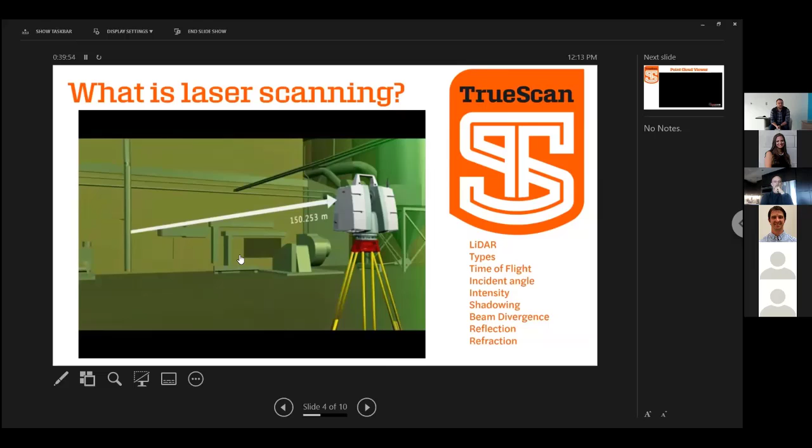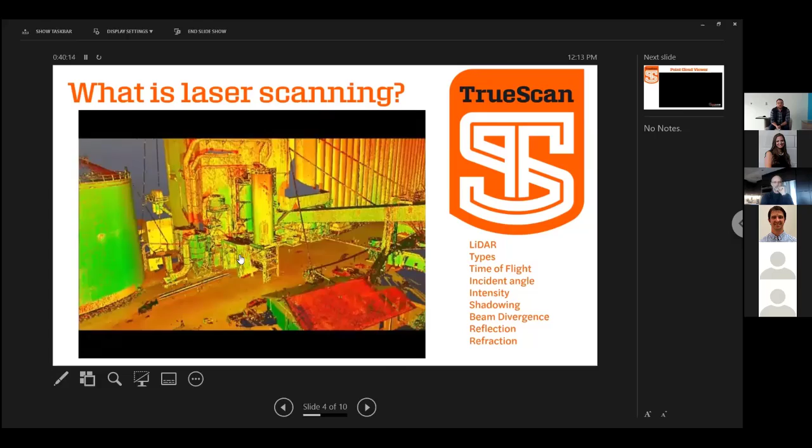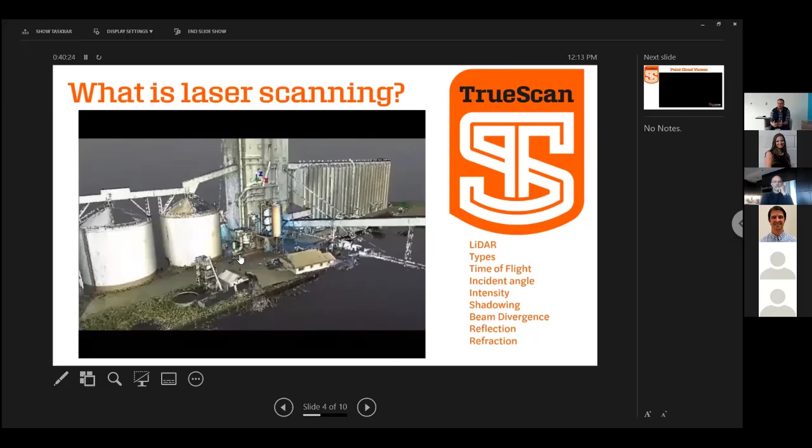It calculates its horizontal and vertical coordinate, and the result is a full point cloud that represents the space, and every scan is accurate to within, depending on the scanner you're using, about 1 millimeter. So that's the information that it picked up from one single scan. And then you also go through a registration process where you stitch multiple scans together in order to capture the backside of walls and a space in its entirety. And you can really accurately and really quickly capture that site and bring it into your computer to work alongside you with your design.

Let's see here. Here is the result of a scan. So this is a point cloud that we're flying through here in Autodesk Recap. You can see the immersive way that you can just be within the site. And from Recap, you can measure, you can identify critical areas that are important to your design. You can even count bolt patterns, and you can really be in the space.

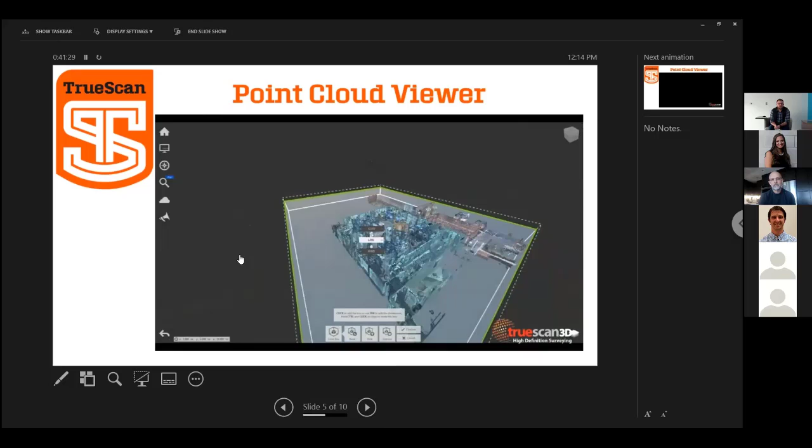And it provides a way for you to avoid going back to the site and missing things because it's all right there. Within Recap, you can section through. It's a really easy to use software tool. If you guys are Autodesk users, I think you would find it really simple and easy to use.

And then the great thing about Recap is the Recap file can be inserted as a link directly into Revit. And then you can basically model over top of the point cloud. We do have some specialized software that helps us model faster, things like pipes that can be automatically extracted, cylindrical objects. But then a lot of the model is actually just traced.

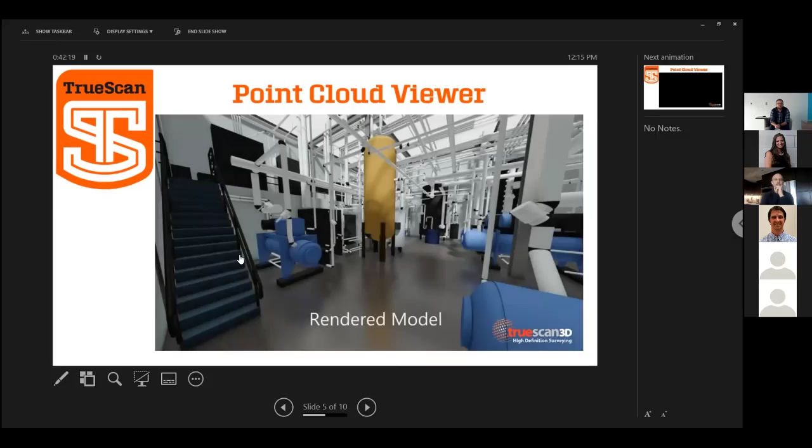And that's done by just cutting a lot of sections and being really careful with tracing accurately over the point cloud. As you can see there, the point cloud versus the final product in the model.

Let's go to the next slide. I'll show you a couple, or maybe just one project example due to our time. Many of you may recognize this building, downtown Cincinnati, 4th and Vine. A lot of people know it as the PNC building.

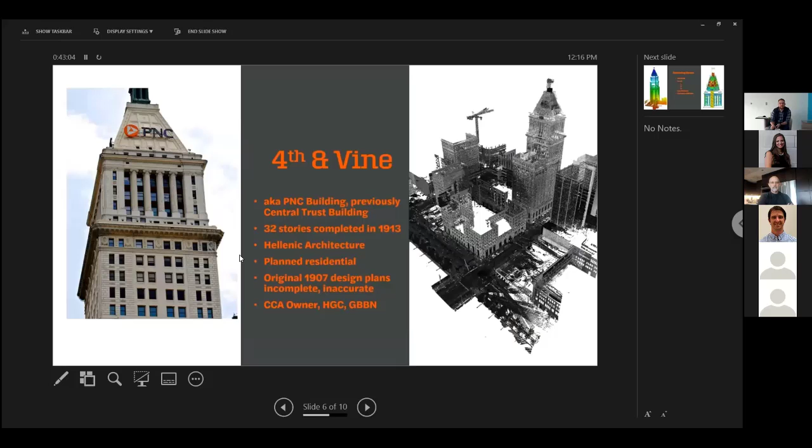This was a really old building that they were doing some renovations to a few different floors, and they didn't have accurate plans. They felt like they didn't have accurate plans. Obviously, built in 1913, what documentation you have there is going to be really old. And as we found, they were pretty outdated.

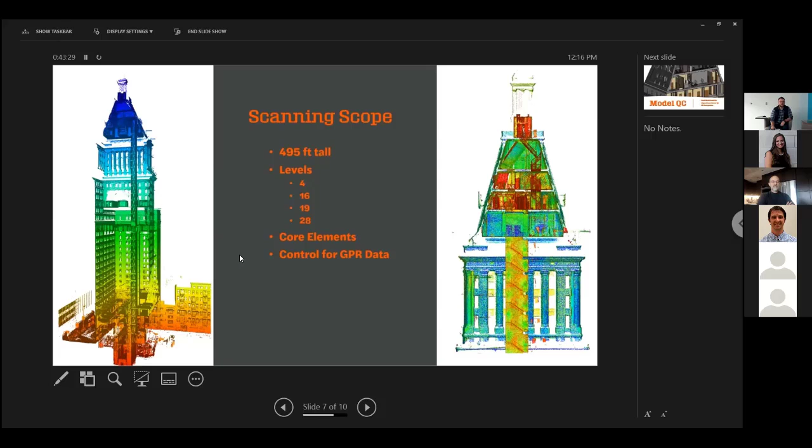You can see here the scan. We scanned the exterior, and then we scanned the 4th, 16th, 19th, and 28th floor specifically. And those were all tied together through a stairwell. And then we put that on a survey control. We aligned that to their existing Revit model to some columns.

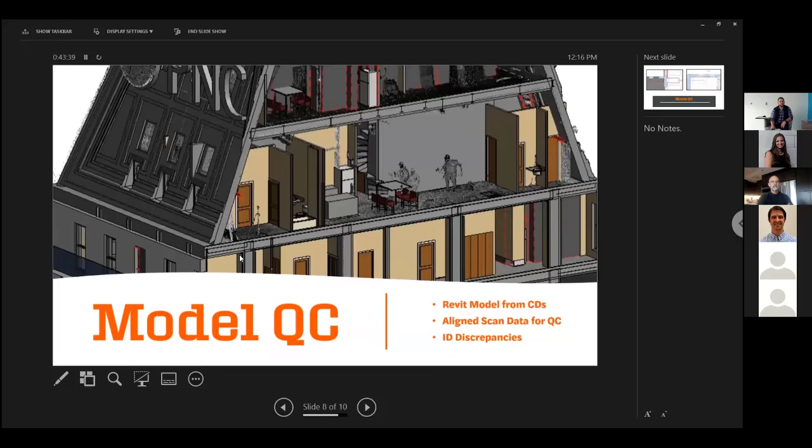When it's aligned to their columns, it comes in generally to the correct location. You can insert the point cloud via shared coordinates directly into the Revit model. So here you can see the cloud on top of their Revit model. You can see that the floor elevations actually aligned really well, which was somewhat surprising.

But we did find some major issues. There was a sky bridge over the road that connected to the building that you can see there on the left. The left side is where the bridge is kind of coming into the building. And we measured that was off over 3 feet, 3 feet 9 inches about. So that had a major impact on their design, and they were really glad that we found that error because it saved them a lot of time and headache.

And then the same on the right, there were just issues with where the modeled window was, where the design window was, and where it ended up being. We found a lot of these all throughout the space. As you can see, that's about 1.5 feet off, and that has an effect when you're trying to draw and design for partitions and bathrooms, and you're trying to fit within a space and meet your codes and everything. You want to know these discrepancies, and those were pretty large discrepancies, and we see that all the time on older buildings.

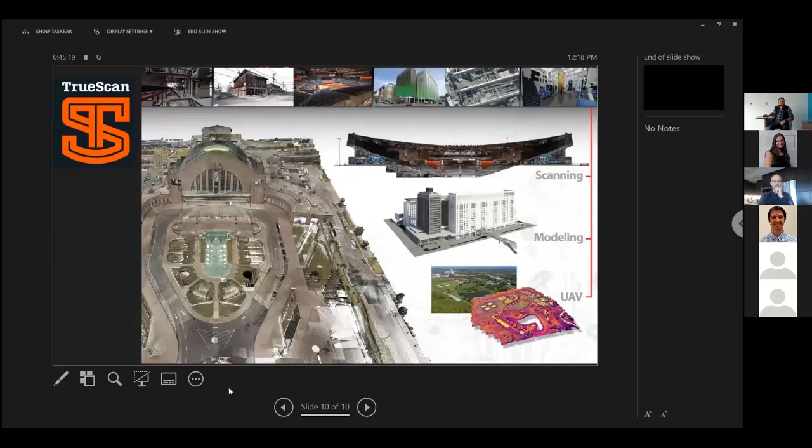So just due to time, that's the only project I had for you. Let's see if I can get out of here. With the remaining time that I have, I wanted to show you a project that we recently did. This is actually a project in Columbus that we did a couple of months ago, and it is an old school. It's called Starling School, and they are turning this into some type of housing, low-income housing, I believe.

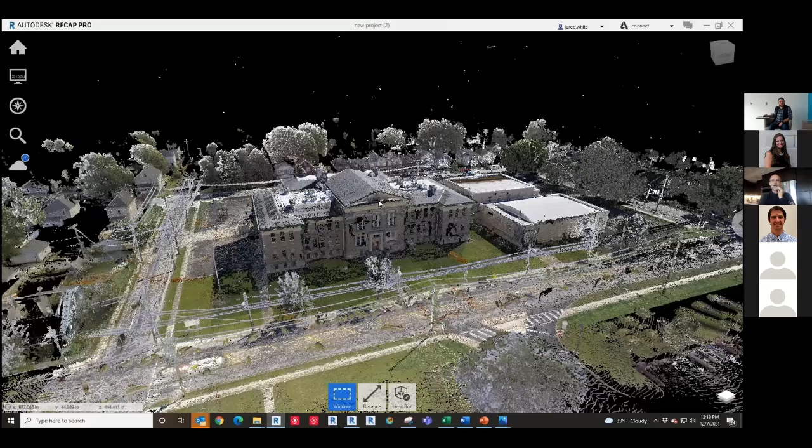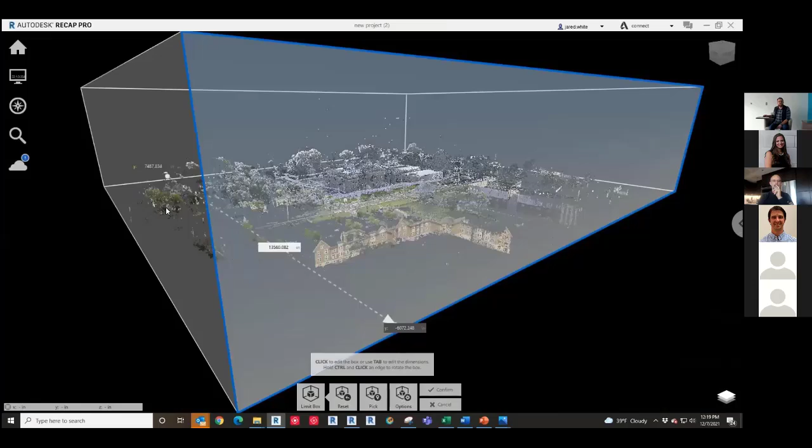It's a historic school. They had some kind of grant to renovate the school portion, or this portion of the building. This portion is being demolished. So we went in and scanned it. They didn't have accurate plans or any kind of accurate documentation, and we scanned the entire building inside and out, including above ceiling in some areas, and the attic to capture the roof. So there you can see all the way through the building.

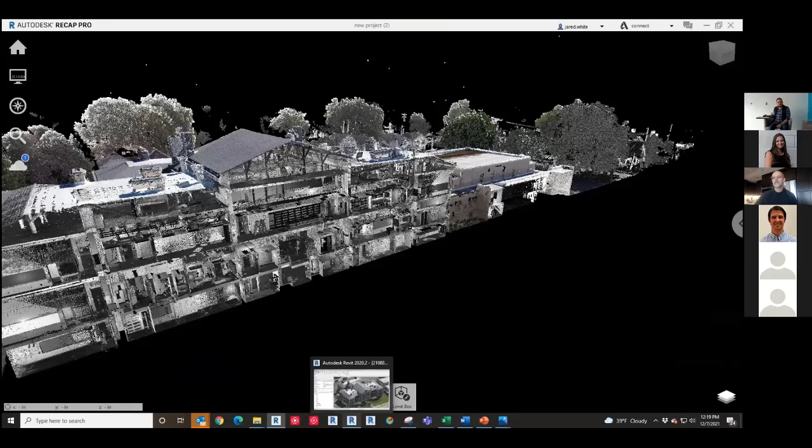So a fairly complex building because there were a couple of different additions. The floor heights are sort of all over the place, and that's a very difficult thing to measure in the field. But we were able to go into the school within about 3 days. We captured the entire building, and then registered it, and then we also turned that into, if I can pull it up, a Revit model.

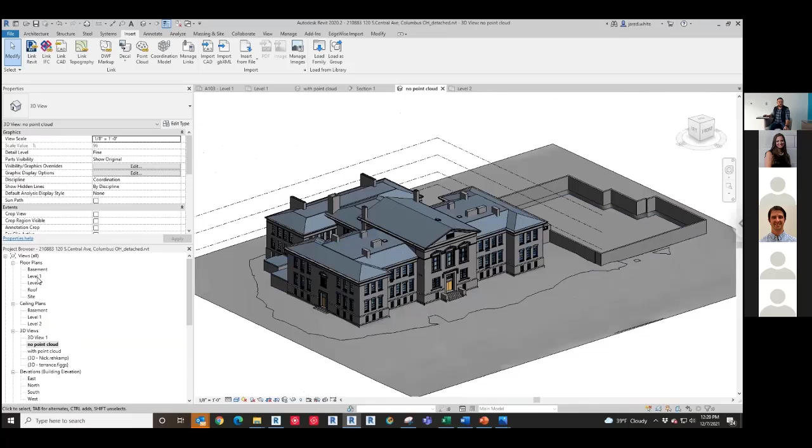As I said before, that point cloud can be brought right into Revit, and then basically reverse engineered, if you will. So there you have the two stacked on top of each other. And here is the final product, which is sort of the launching point for our client in this case. It gives them a really great base model and something they can trust to start their design. Really accurate floor plans, really accurate floor heights, floor elevations, and then obviously structure is also part of that.

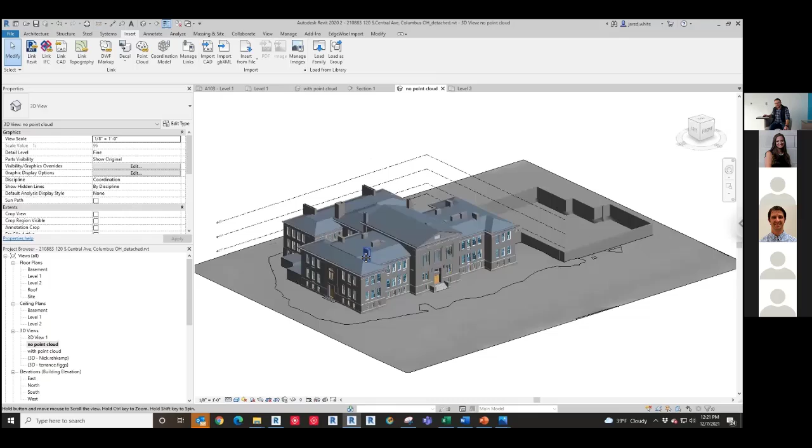Yeah, we have a question here. Go ahead. That's awesome. Yeah, hi.

So it's been a while, but I've used a point cloud model to translate that into a Revit model. And I'm curious with this process, how you go about approximating the level of detail that's shown in the point cloud model when translating that, say, into a wall that's square on one end but not on the other, and might not necessarily be plumb. Do you take like an average, or how do you get to what was shown in that floor plan you presented? Yeah, that's a great question, and it's something that comes up a lot.

A lot of times we need to have that conversation with our client because every project can be a little bit different. Sometimes they want to show the true condition of the wall. If it is crooked, they really want to show it as being not parallel, perpendicular. But in most cases, I would say 95% of our projects, we try to keep modeled elements perpendicular and plumb to within reason.

We state level of accuracy in our proposal. If something gets outside of whatever tolerance is stated or discussed, then the wall would maybe need to be broken, or maybe we talk about how we want to represent that. And then as far as detail, that's also a conversation, that the scanner is only picking up what it can see. So I don't know the way that the wall is built. I don't know the internal components of the wall or whatever it is that we're modeling. All I see is the surface.

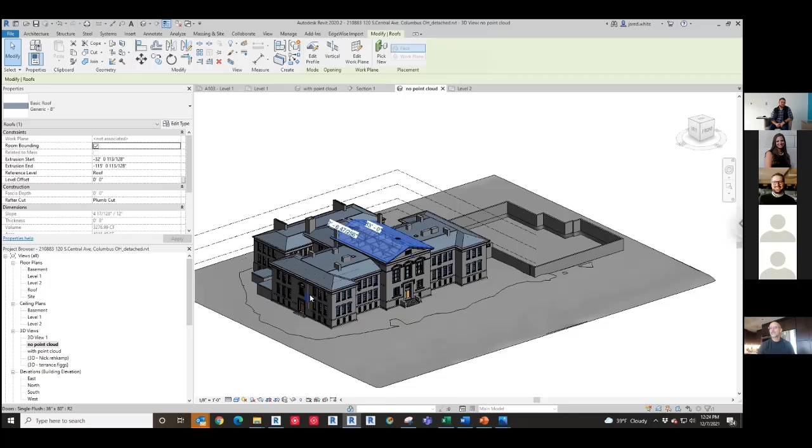And we can model simple holes in the wall for doorways, or we can put in a door with the correct swing, or we can put in the door with all the trim and the skylights and all the detail within a door. That's just part of the conversation and what you need and what would bring the most value to your project. Hopefully that answers your question.

Yep. Looks like we have two more questions and I want to move on. One of which here is asked, what is the approximate turnaround time? You said about 3 days to scan this building full inside and out, and the turnaround time to produce a model at this level? I know that's kind of hard to answer, it's per project. But it depends. It depends.

So we were in the building for 3 days, and we just had one guy in this case, which we could attack this in 1 day if we needed to. But in this case, we had one guy. I believe he was in there for 3 days, and then the raw data comes back to the office and it gets registered. That usually takes about a day or two.

And then the model in this case is, depending how many resources we have to put on it, between 1 and 2 weeks to turn around after the point cloud is delivered. So all in all, you're probably between 3 to 3.5 weeks, I would say. Okay, and I'm sure a lot of that comes down to how much detail you need, as the previous question asked. Awesome, thank you. Absolutely.

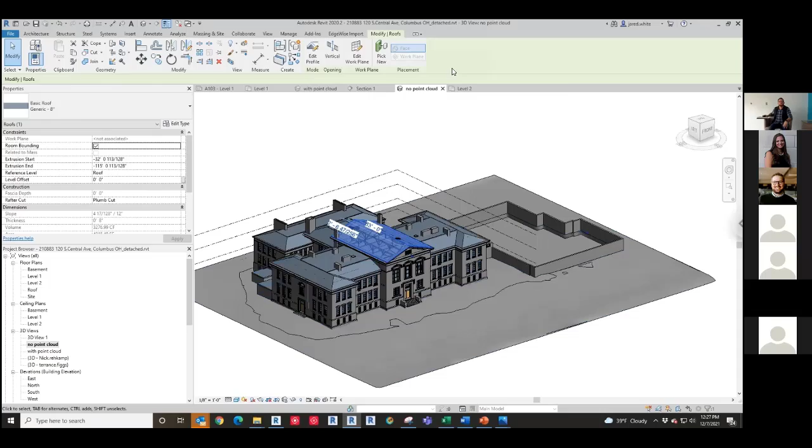But with that being said, let's go ahead and transition over to Phil to talk about Enscape. Can you see my screen? Yes. Oh, great. You guys can hear me as well.

Good. So let's talk about really, it's not so much about real-time rendering, but it's also about just increasing understanding and helping people to have confidence during the design process that what they are imagining is actually going to happen. And I've been working with the Enscape team coming up on 6 years or so, from the very beginning. I reached out to Thomas, who was the CEO at the time, and was just blown away by what they had put together.

And I think the challenge for rendering, we've always done it. I remember sleeping under my desk in order to create renderings, because if for some reason the computer crashed, you had to start again. And what Enscape has done, I think they've really just set the bar. They've really raised the standard with regard to rendering, because it's real time. So why is that important?

I think Revit is incredibly valuable. We're seeing in the previous presentation, having models is just essential for a base level understanding of a design and a design process. And I think what you get from Revit in those terms is a lot of analytic information. You get plans, sections, elevations, schedules. This is a hidden line perspective of a project that I use for demonstrating and training people on how to use Enscape with best practices.

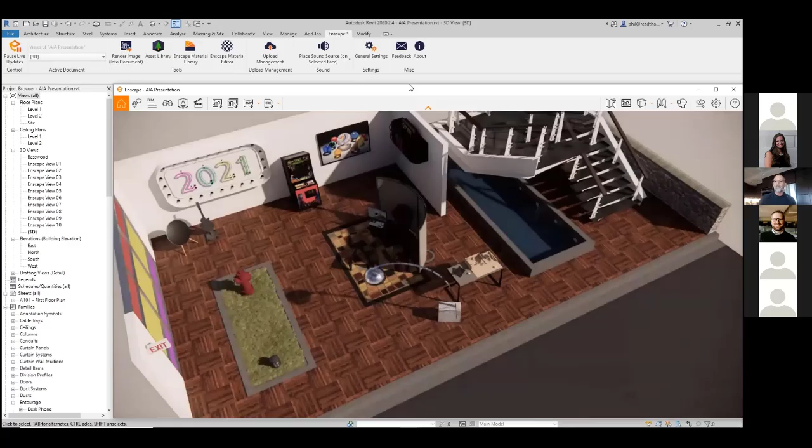This project's going to take about 15, 20 seconds to open. A really large project might take 30 seconds or a minute to open. And then you're going to be able to navigate and fully explore that project, changing the time of day, changing the time of year, and really explore that project as if you're in first person mode.

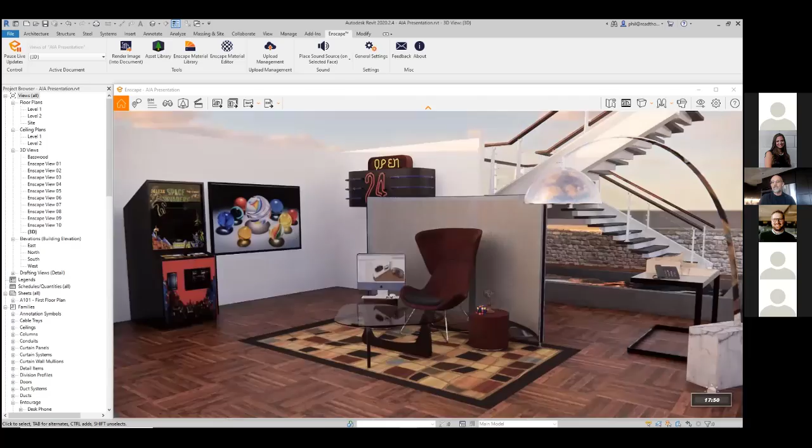So I'm just going to navigate to a point. I'll go ahead and turn on... I'm just going to move the time of day here and help you understand that you're really seeing the information in a very, very emotional way. And I'm just going to keep going and changing the time of day until the sun actually goes down.

So what Enscape is doing is just taking what we've already put into Revit and then allowing us to visualize that to an emotional level of detail, either on the desktop, on the web, even in VR. So it's very, very easy to use. It's also very fast. And so I'd like to just illustrate that right now.

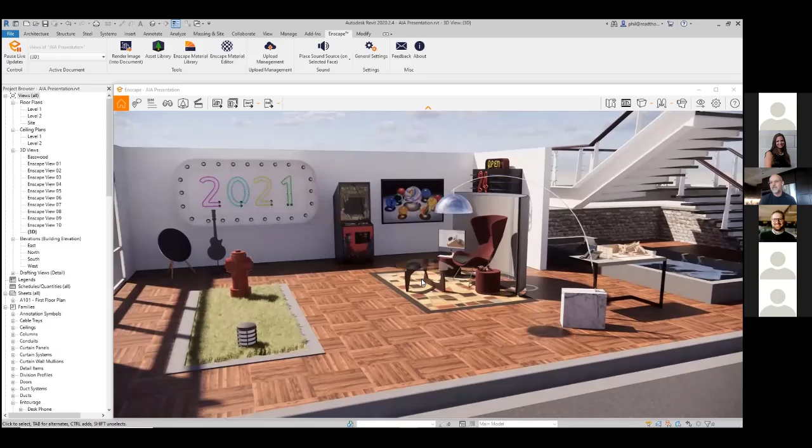You know, the design process is one of iteration. Things never stop moving. We're looking at options, and it's really important to be able to see those options and see those changes in real time.

So if we want to change the geometry of something or the material of something, the way we change it in Enscape is actually to go back to the design tool and make the change there. So I've just selected this floor, and I'm going to do something that's very familiar in Revit, and that is just go into the type parameters and change the material of this floor. It's going to open up the material editor, and let's just choose a different flooring type, just a different floor material, and then select OK.

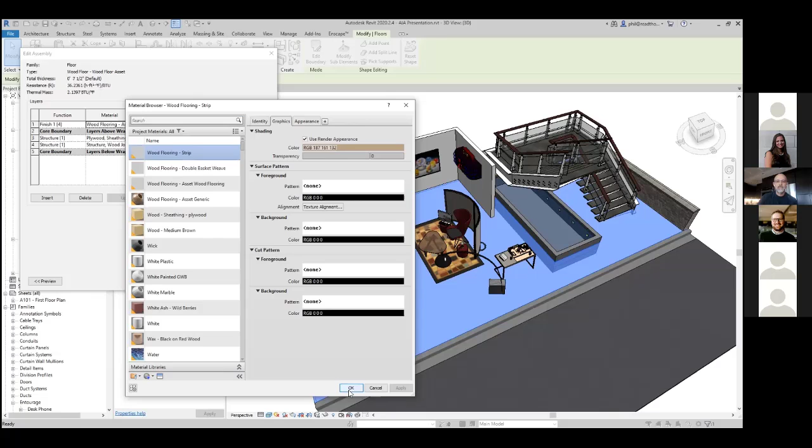And then I'm going to go back to Enscape for a moment just to let you see what's here. And then we're going to go back to Revit and complete this command and say OK. By the time that's done, this is going to update in just a moment. So that floor is updated. It's updated in the model, which means it's updated in Enscape.

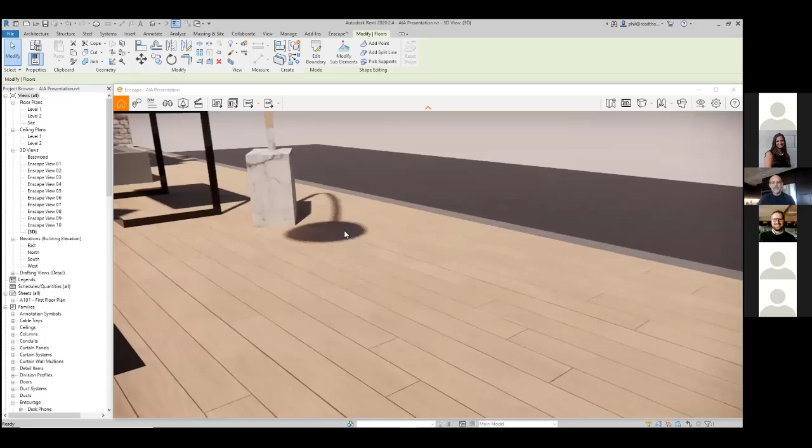And the level of detail here can be really extraordinary. So I'm just going to bring the sun down just so we can start to see the reflections and the material finish in this floor. So you see that hot spot, and you're starting to see where the light is reflecting. And it's not just about the material or the color or the texture of the material—it's also about how that material reflects light.

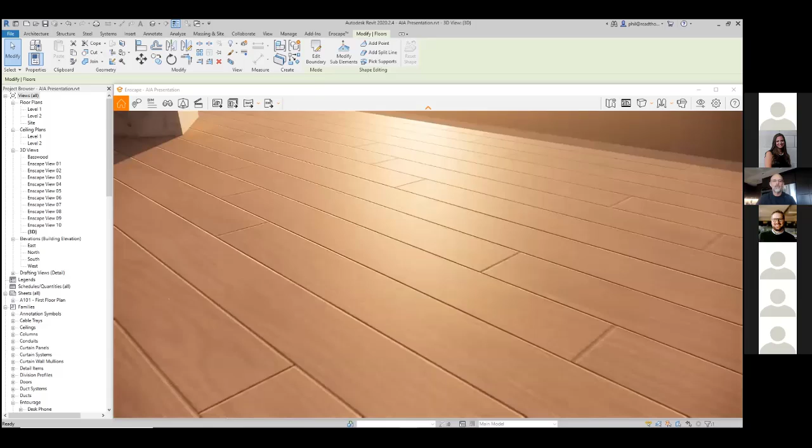That's how something appears natural. And if it doesn't reflect the light in a very natural way, then it begins to look plastic. So it's very important that cloth have a cloth type texture, and wood has a texture where you can see the grain and you can see the light bouncing through that grain.

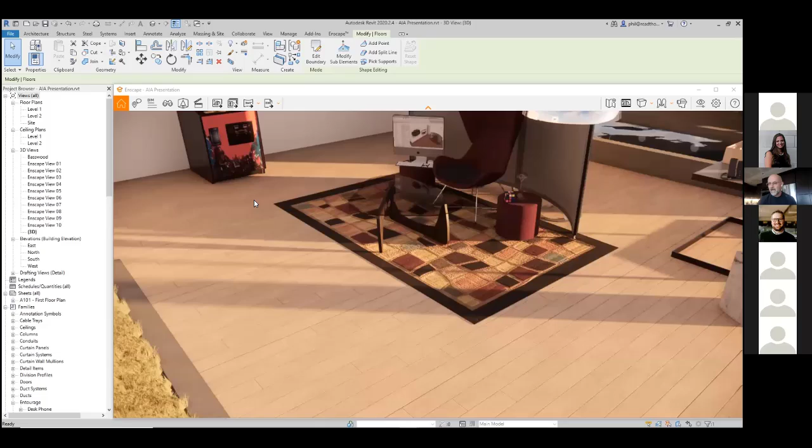So right away from the very beginning, it's very easy. You simply start it. It's fast. As you make changes, they update in real time. It's not expensive—Enscape is an annual subscription, and the annual subscription for a network license is about $800 a year. And I think the big benefit is that it's just really, really beautiful.

Enscape—the two really critical pieces that you need to think about when you're working inside of Revit: number one is how are your lights going to appear, and number two is how your materials are going to appear. And lighting comes from two artifacts in Revit.

One of those artifacts is the actual light object that is inside a lighting family. So I'm just going to jump over to Revit here, zoom in, and open up one of these light families. All of your light categories in Revit have a light object inside them. And if we look at this in 3D, we can actually see the light object. That light object that is native to Revit families is what illuminates inside of Enscape.

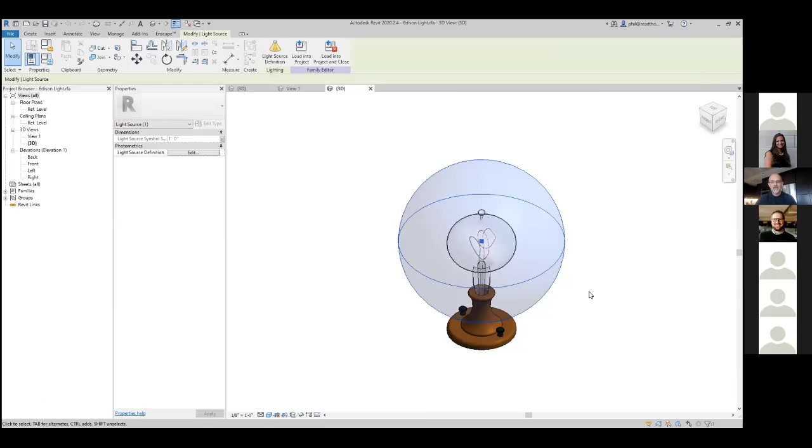So that's all that you need. They're going to work automatically. So if we go back to Enscape and change the time of day, the reason this light appears to illuminate is because of the light family, the light object that's inside of the family.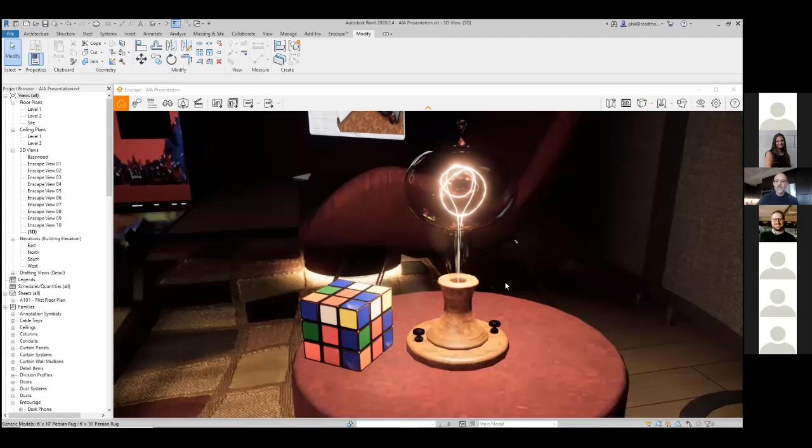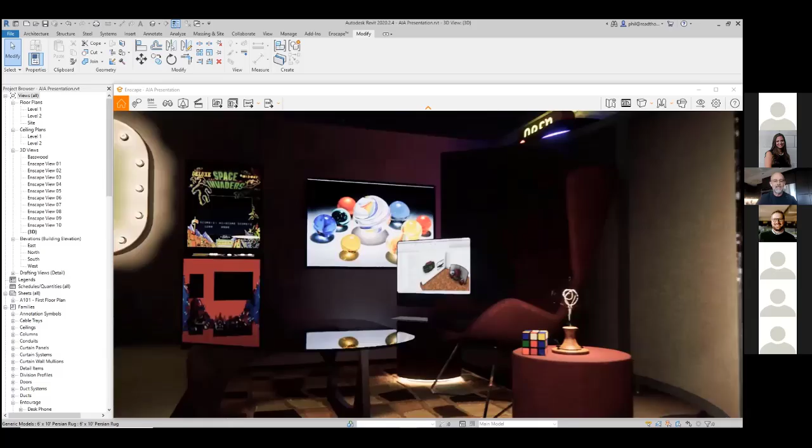The other illumination artifact that's native to Revit is self-illumination, and that's self-illumination of material. So the little wire inside this light bulb has a material applied to it that's also self-illuminated. Things like reveals, accent lighting, TV screens, computer monitors—all of those effects are created by selecting the material and giving it a subtle amount of self-illumination. That gives you, just those two artifacts alone, an entire universe of lighting. It's just the illumination of the geometry or a light object.

That's number one. Number two is the material. It's really important that your material not only have the appropriate kind of photographic texture, but also the appropriate bump map, displacement maps, grit, grain, so that the light doesn't bounce off of the geometry in a very plastic looking, perfect, smooth way. So if you have a wood floor and you don't have that wood grain in there, it's not going to look natural, and then it's kind of distracting.

You don't have to do this stuff at the beginning. At the beginning of the design, you don't have time to put all the lights in and all the materials in, but as the design develops, it's all there.

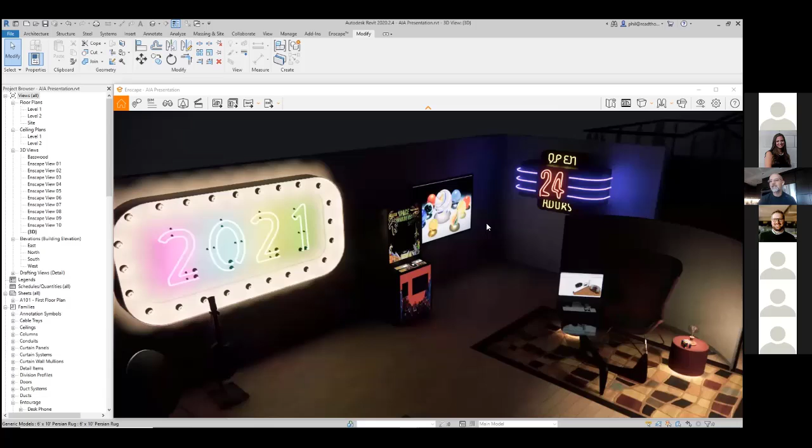The third thing that I want to illustrate is the importance of Revit to maintain that analytic truth and yet push that information over to Enscape in a way that can create this sort of emotional quality and maintain the coordination between the two. So I'm going to turn the lights up here in this model, and I'm just going to back out. One of the issues that we have in Revit is over modeling geometry.

And that can really give your models a lot of trouble. Early on, we don't really know exactly what that component might be. We just know that we need a chair, we need a table, we need a piece of furniture. Later on, we're going to decide exactly what that might be in order to create the emotional level of detail, and we can actually simulate this kind of environment inside of Enscape.

Enscape has an asset library with an enormity of beautiful furniture, office entourage, people, and cars. But when you're inside of Revit and you just want to place a piece of furniture, I'm just going to place a chair here—this is just a simple task office chair. And this task chair is sufficient for where is it, what is it, how many do we have, what level it is on, and how it's going to schedule.

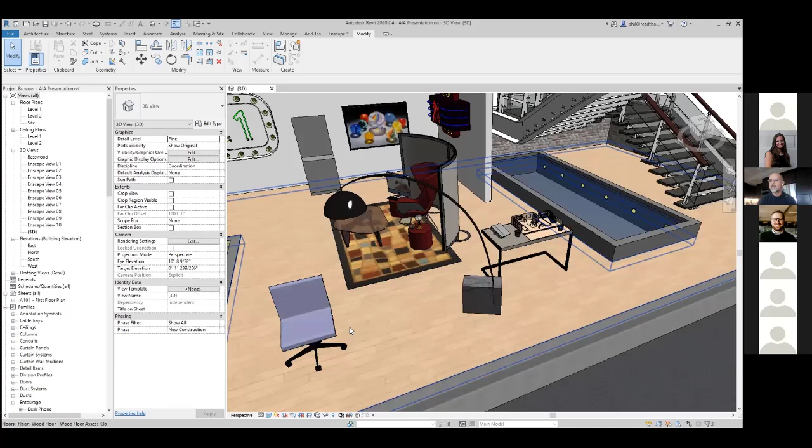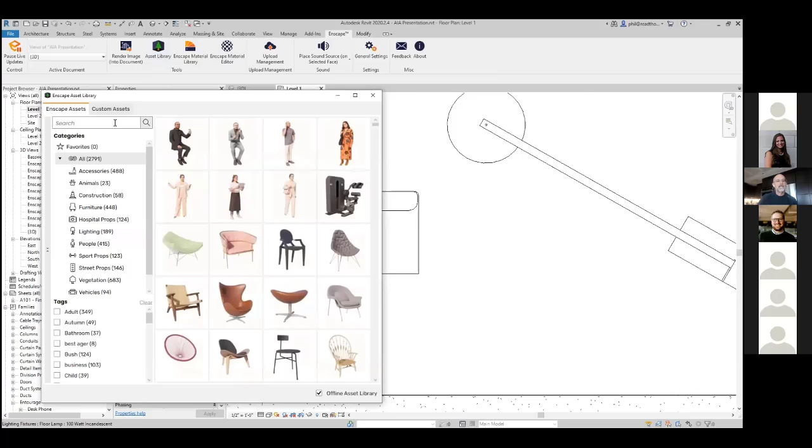The task chair looks fantastic with regard to, that's all it needs to be from an analytic standpoint: plan, sections, elevation, schedules. Now, Enscape has beautiful assets as well. I'm just going to open up the asset library and do a quick keyword search for furniture or chairs, and select an office chair here. Then what you can actually do is make an association between your Enscape asset and your Revit family so that they're continually coordinated.

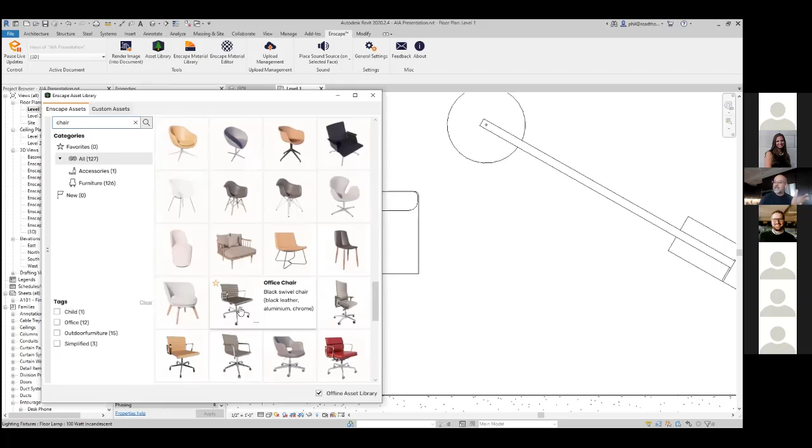And there's a particular chair that I really like because of the details. So I'm just scrolling down here trying to find it—and it's this one. So I'm going to place this office chair in the project. Now, Enscape assets are actually not modeled natively in Revit; they're modeled in Blender, to a very high level of detail. I'm just going to place this chair here in plan.

And I think right away you can see the challenge: this Revit component is perfect from the standpoint of its plan, sections, elevations. This Enscape asset looks amazing—I mean, this is just down to the grit, grain, and texture of the leather. But from an analytic standpoint, it's really going to clutter the Revit file.

And Enscape assets also, when they're making these components in Blender, they don't know what category to put them on, they don't know which orientation, they don't know where the origin is, but they're beautiful. So here's what you can do to save you a lot of time and aggravation, where you can keep that beautiful Revit native family and link it to your Enscape asset so that it's always coordinated.

There's another option when you're in the Enscape asset library, down here at the lower right-hand corner, it says link Revit family to asset. I'm going to select this option and do a quick keyword search for this task chair, select it, and select OK.

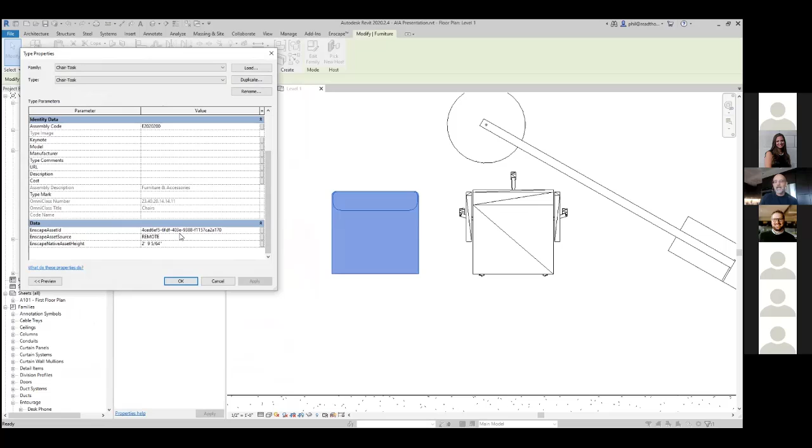What that does is it very quickly, almost instantly, opens the family, builds the parameter data from the Enscape asset, and associates it to the Revit family. So when we select this component and go into the type properties, Enscape has added this asset information to the component. The result is you still see the Revit family in Revit, but now you see an Enscape asset inside of Enscape.

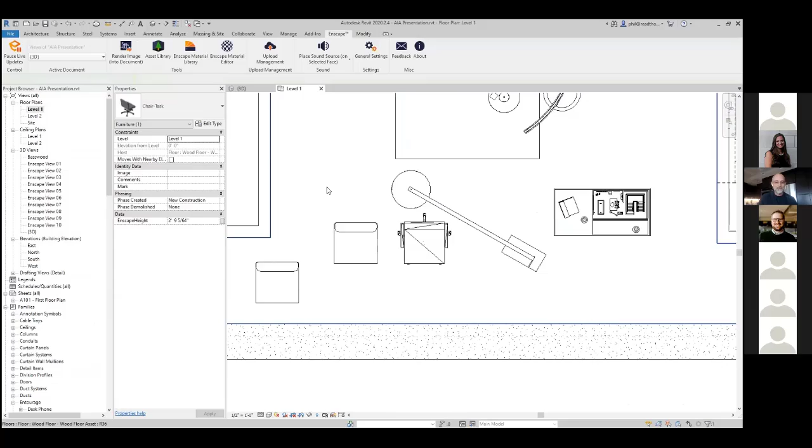And if you move, copy, or make another instance of this chair—so I'm just going to create another copy and place one over here—here's the Enscape asset inside of Enscape.

All right, so that's my presentation for you guys. If you want to go on a deeper dive, I'd be glad to do so with your teams. We can do a best practice webinar, please reach out. That's essentially a quick overview of the value of Enscape and a few techniques with regard to why lighting is important, why materials are important, and why linking Revit families to Enscape assets is important.

Thank you very much. Thank you, Phil, I would just like to say you should have heard the sounds coming out of the people in the room when you linked those two assets together. So thank you for sharing that. Absolutely, glad to do it. Thank you for letting me be part of this presentation today. Absolutely, thank you so much.

Okay, any questions for Phil? Or we can wait till the end. I've got my little timer going on here, so I don't want to go over. I think we got some time, we're actually running a little ahead of schedule, so this is great. So yeah, if there's any questions, feel free to ask them.

So can you do that with any asset? You can do it with trees, bushes. Yes, you can do it with any asset. You can even do it with your custom assets.

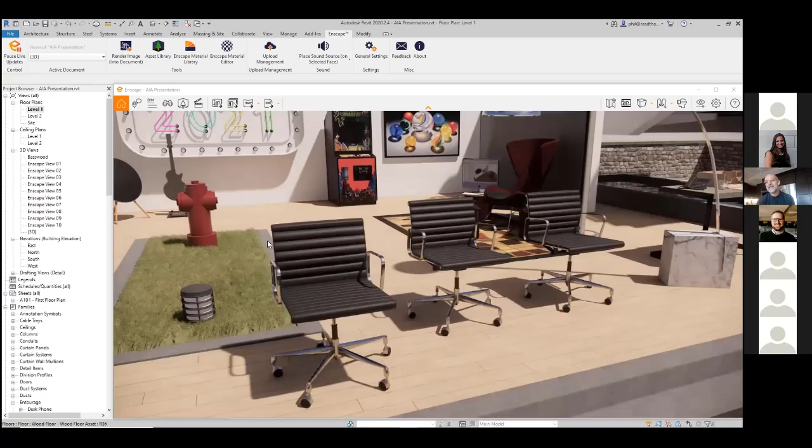If you guys know Joseph Kim, I'm like, Joseph, we got to get better assets inside of Enscape. So he's taking SketchUp warehouse components and turning them into Enscape assets. I build a Revit family and link them, and then we put an animated texture inside the screen. You can take trees—I don't want a complicated tree inside of Revit, I just want a circle that's model lines on the ground with a little dash pattern for the drip edge, and then link it to an Enscape asset.

The only thing you'll have to do is, in some cases, the Enscape asset team can't predict the orientation or the origin of the family, whether or not it's going to match the one you've created. And you can't manipulate the origin and orientation of the Enscape asset. So you probably have to open your Revit family, possibly move it, possibly reorient it, and then they'll line up.

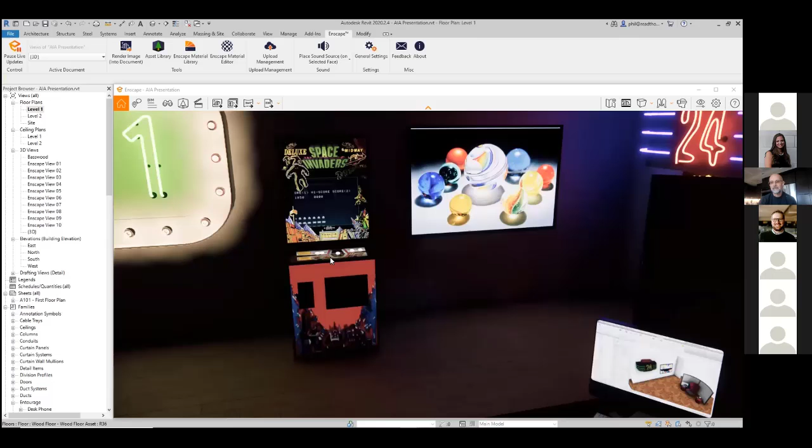When you rotate an asset that's linked, though, does it rotate or does it stay in place, even if you rotate, say, that chair? Yeah, you're going to go back to Revit, hit your space bar, move the chair, and then when you go back to Enscape, it's going to be moved. It's just, yeah, gotcha.

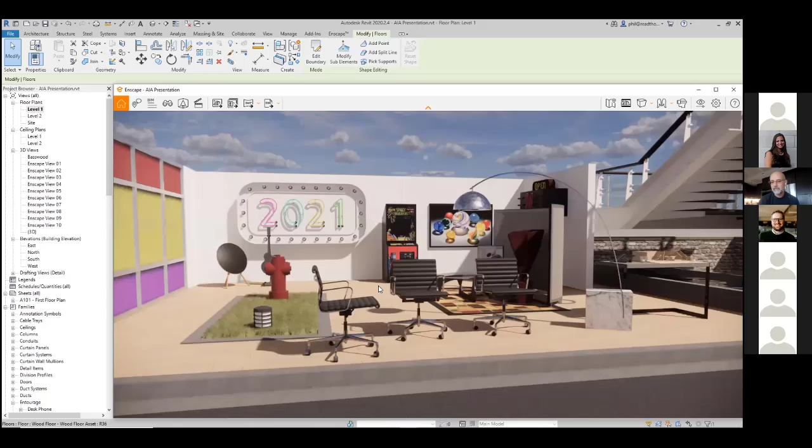Awesome, thank you. We did get a question come in through the chat asking if you could demonstrate Enscape's material editor. That's what I was about to do. Yeah, okay, and I'll be upfront about this.

The material editor in Enscape, number one, it only works with Revit generic material types. So if you open the material editor and go, wait, where's all my Revit materials? If they're not generic material types, they're not going to show up.

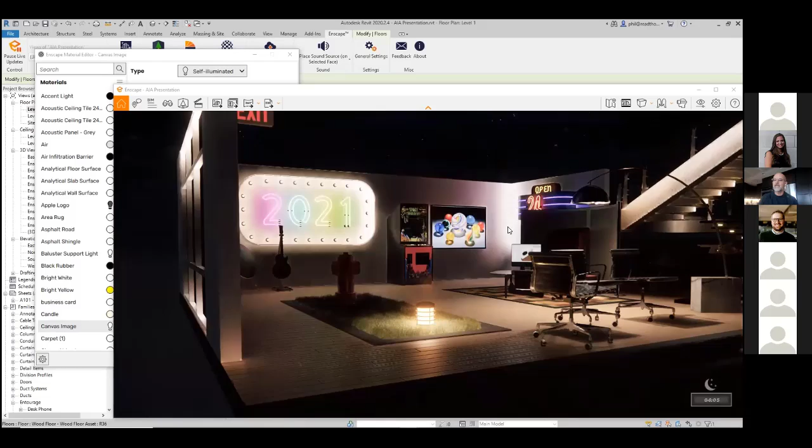I'm just going to select material here, and this is the material texture for the big TV screen in the back. It's really not a marble screen, it's a TV screen, but it's got the marble painting on it. You see how it's illuminated? Well, that texture has illumination applied, and it has a material applied, and it has a little bit of bump—I just like that little bit of texture. But this is the material editor.

Enscape also has a material library, but at the moment there are workflow issues around multi-user workflow. My best practice is to put all your custom materials in a folder at the top level where everyone can see them. And they haven't really thought this through with the Enscape material editor. So a lot of times if I want that Enscape material and I want other people to see them, I'm going to go and find that texture somewhere on my hard drive and take all of the pieces and parts of that texture and move it into my project custom texture folder.

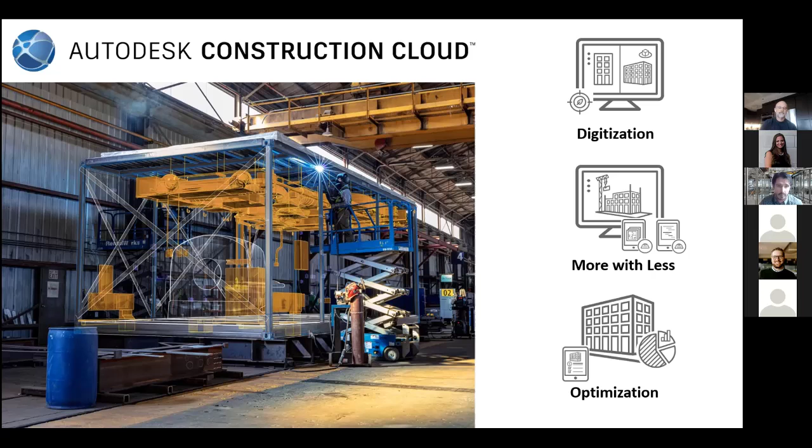The main point of this piece of the platform is to enable design teams that are highly iterative, in many cases distributed across different geographies and offices, to get a better workflow in place for model management, version control, and some of the communication practices in a project. It's built on the idea that we're trying to build out best practices, optimize over time and focus on continuous improvement, whether that's a project or an internal company trying to solve those things. The platform can handle both.

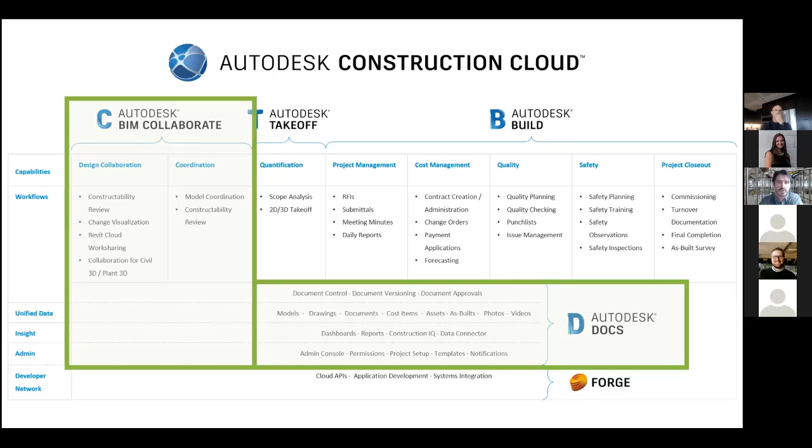So again, a lot to this. We're not going to cover it all today, but I'm gonna go through a pretty quick and dirty demo, if you will, of the main components of this platform. For some of you guys, you might already be using it. Others, this might be completely new. If anybody is a former BIM 360 user or even current BIM 360 user, this is essentially the next generation of that platform, right? So we'll jump into the demo component.

I'm not a big PowerPoint guy, so we'll get into the specifics here. Josh, just a spot check. Can you guys see my screen? Should be Google Chrome at this point. Yep, we got you. Awesome, cool.

All right, so just a couple basics for everybody, just to understand the mindset here. I am in a Google Chrome environment. I am signed into my account. I'm affiliated with a project. You guys can see at the top of the screen, this Blue Devil Residence Hall. And I'm in basically the project Autodesk Docs aspect, where all the files essentially would live for a project.

Couple things just to point out. When I talk about the platform, we built this out in terms of specific modules that are really geared around specific functionality that's needed for maybe specific personas involved in a project, maybe specific workflows. The important thing to understand here is that the capabilities of the platform can be segmented out by persona.

I, for example, am an admin. I have access to everything. That's not always the case, right? If we have someone that's maybe geared around Revit modeling specifically, not really involved in any construction type activities, they're probably only going to see maybe these top two, Docs and Design Collaboration, potentially Model Coordination if we're talking about some clash workflows.

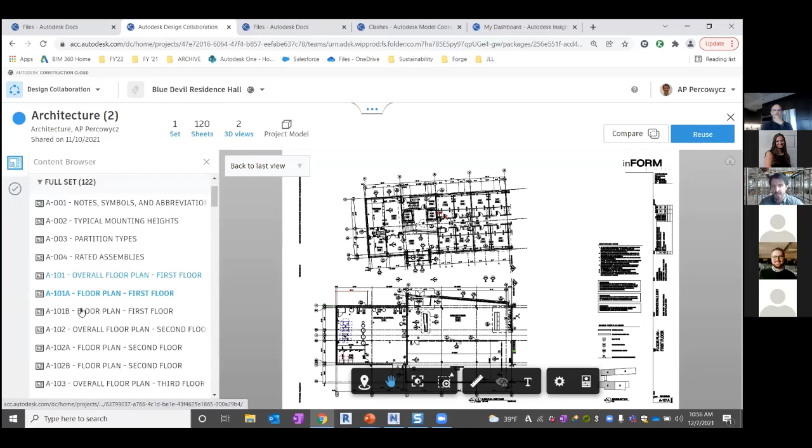And this will launch open the 3D viewer that it seems like I'm still unfortunately having some issues with. But nonetheless, from a Revit standpoint, I can start understanding, and here we go, I got a sheet to load. I can start understanding the scope of that share, the state of the model, whether it's 3D or 2D, really the system does not care. I can define in Revit whatever I want to push out.

So if I'm trending towards a milestone, I can share the appropriate sheets and provide an environment where the team can start self-serving some of that viewing of most current information across the project ecosystem, regardless of the discipline. You can click in on, say, the electrical set and be able to view the scope of their latest and greatest. The nice thing about this is I can take this a step further.

Because all of the data is being self-contained in the cloud environment, it allows me to wrap some more advanced functionality around this that enables the workflow, specifically the ability to compare versions of these models. So if I wanted to compare the version of architecture from November 10th versus the last time architecture shared that model, going back to October, let's say I'm a mechanical designer. I want to understand what implications might affect my discipline. Going into this compare allows me to select those versions of the models and show those changes.

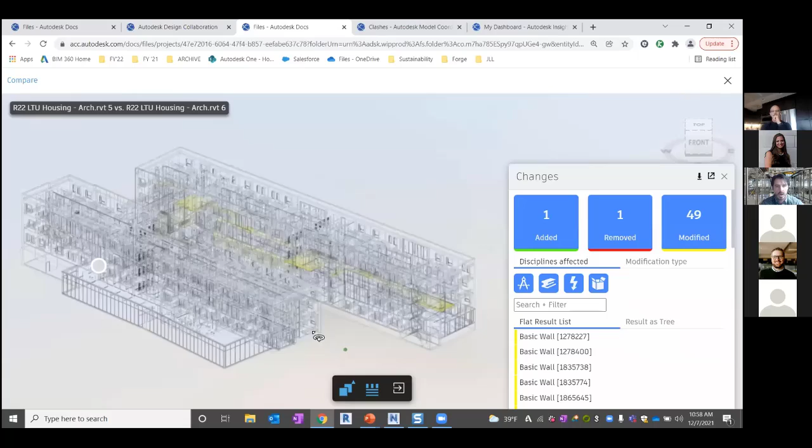And I'll launch open a viewer where I've already got these showing in terms of the change visualization. And you'll see the model in terms of the architecture versions is being colorized for me. And it's actually articulating what's been added, what's been removed, and most importantly, what's been modified in this environment.

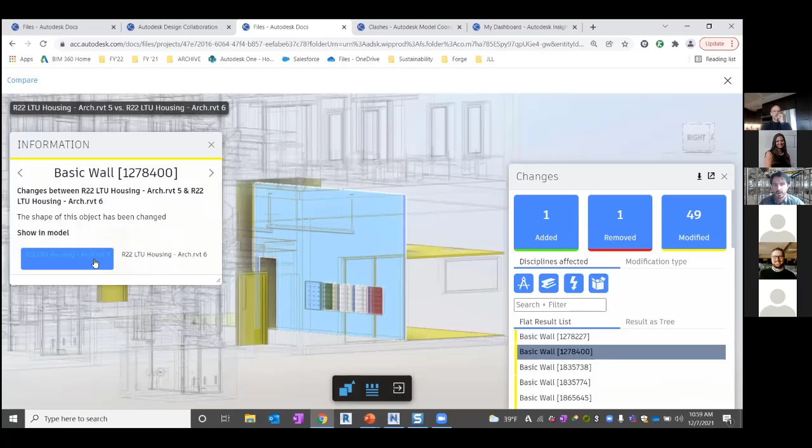And this is dynamic as well, right? I didn't get to show you guys the viewer because it was getting hung up earlier, but nonetheless, you guys can see similar capability here. I can zoom in and out, I can start selecting on objects. The nice thing about this is I can actually start visually understanding what changes have happened between those objects, right?

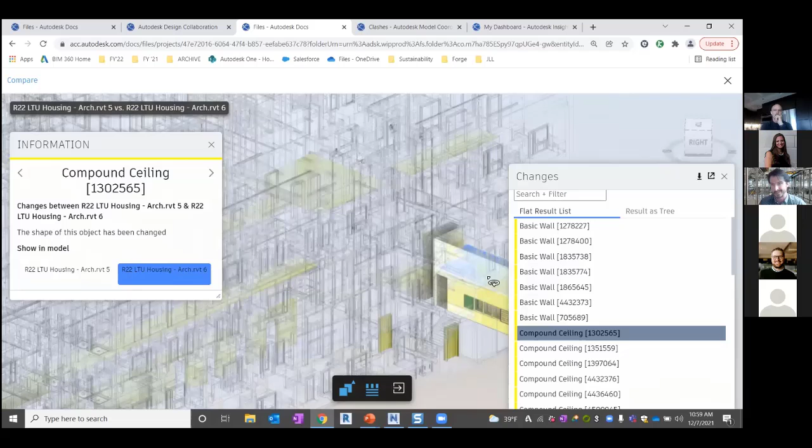So, version 6, latest and greatest of this architecture versus version 5. If I cycle back and forth, it's very slight, right? But you can see a small change in the geometry here. I think more importantly, if it's something more than just a geometry change, say an above head ceiling, compound ceiling being shifted. This is something our projects used to struggle with quite often when we talk about multidiscipline coordination.

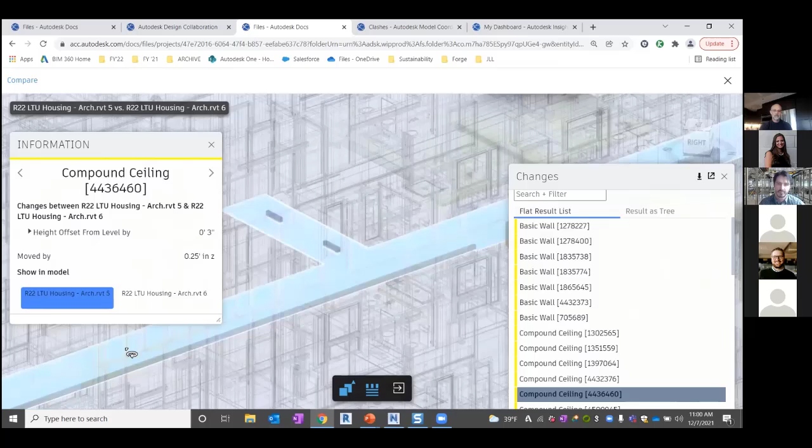Really we're just providing an avenue to get a lot more transparent about that change management. And again, be able to visually track some of those things in a project timeline type constraint, right? So it's very clear, okay, if I'm working off of 2-month-old mechanical, I probably need to request an update, right? The backdrop to the system is you can automate a lot of this sharing process as well along the way. So it makes it that much easier and less time consuming for, say, a BIM lead to manage along the way, right?

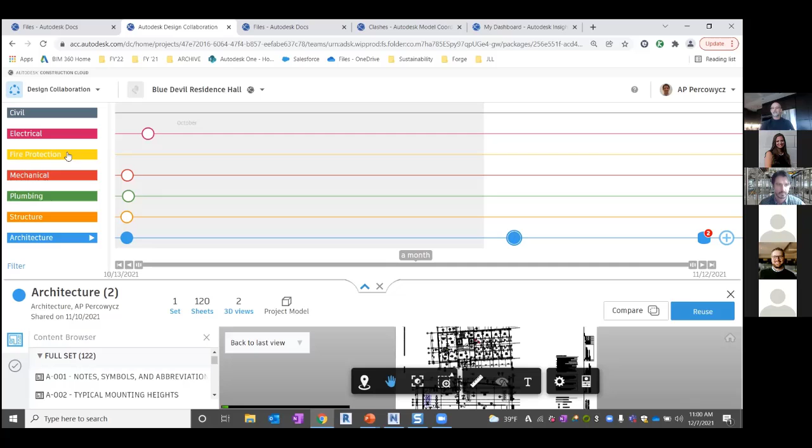So that's kind of the design collaboration piece. I'm going to shift gears slightly, and then I think we can open up for a few questions as well. Not only do I have the ability to provide this kind of timelined approach to the infrastructure, we can also wrap downstream workflows in terms of quality checks on top of this kind of version tracking and update cycle. And specifically what I mean by that is model coordination.

I know for a lot of architects, even design engineers out there, they're not always involved in, say, a clashing constructability review workflow, but a lot of times they are being asked to participate. And I think that's not going away. I think that as a general trend, it's happening more and more out there. The nice thing about this is because all of my versions are consolidated in one project environment, I can use the model coordination module, which will essentially build out, based on my models, a clash matrix that I can then, again, same mindset, self-serve some of the quality checking by individual disciplines.

And what I mean by that, right, is if I'm, say, an architect or maybe a plumbing designer, it's very easy for me to go into the clash matrix and understand what models have been provided here. And if I cycle over one here, just for example, right, I have my plumbing coordination model. This is an overall 3D view.

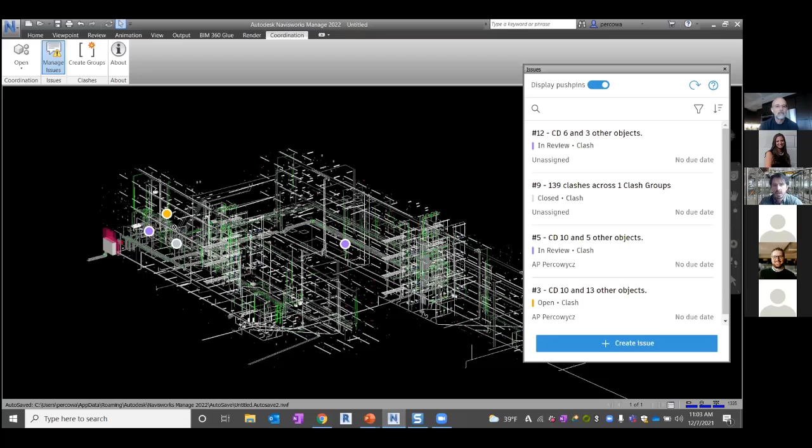And this is kind of a core piece that I think is important to understand about even using our Autodesk Construction Cloud as a whole, is that when I'm tracking, say, action items, like the clashes between specific systems, this Navisworks model is being opened directly from my Autodesk Construction Cloud project, right?

So I'm in the same project that I've been demoing from, and I've literally just opened the plumbing versus electrical, the same clash matrix that I showed you guys on screen. And from here, I'm able to start flagging things as issues along the way. I think this demos a little bit better once the cloud environment loads up, but nonetheless, I'm not going to show you guys a spinning wheel the whole time.

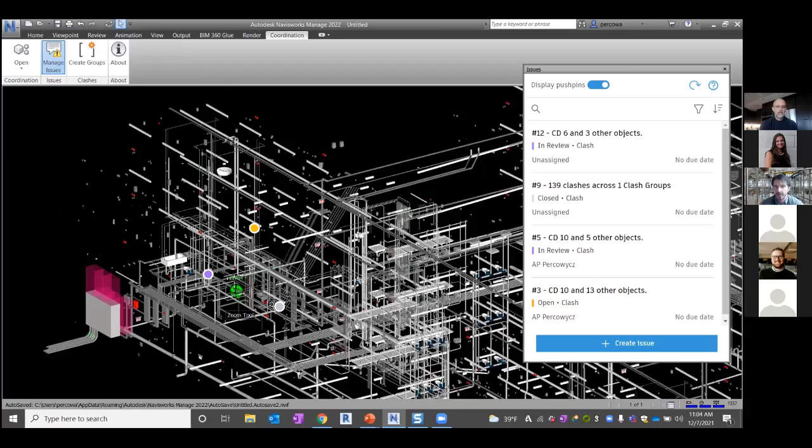Basically when that clash analysis loads up, if there's something that a team needs to act on, I have the ability to create an issue, right? And that's essentially what you guys are seeing on screen in terms of these push pins. They're essentially flagging of a task that can be assigned out to a specific person or company involved in the project. And that person is then responsible for taking action to make the appropriate fix.

I can click in on these. It's going to take me to the specific 3D view it was created from. It's going to show me all of the attributes of the issue itself. If I'm in Revit on the side making these changes, I could close these out on the fly as well.

And the whole point of this workflow, especially using issues as a means to track activities in the project and the design process, is to ensure that over time, our projects are going to hit very specific quality metrics and gear towards a mindset of continuous improvement. I can run reports out of the system. I can set up dashboards in the project environment that will show me things like issue trending and assignment.

I can set up a lot of different capability on top of these workflows that enable the project team to get a better rate of closure and a greater level of transparency to the ongoings of a project.

And for what it's worth, guys, I know the web viewer was not loading up earlier, but it's important to understand that these push pins can be added by anyone, even directly on the Revit models. These issues will round trip directly into Revit as well. So as long as people have access to the proper location inside of, say, the Docs project, they can pop into the architectural model, load up the viewer, and be able to flag issues right from this web viewer to maintain that same type of workflow.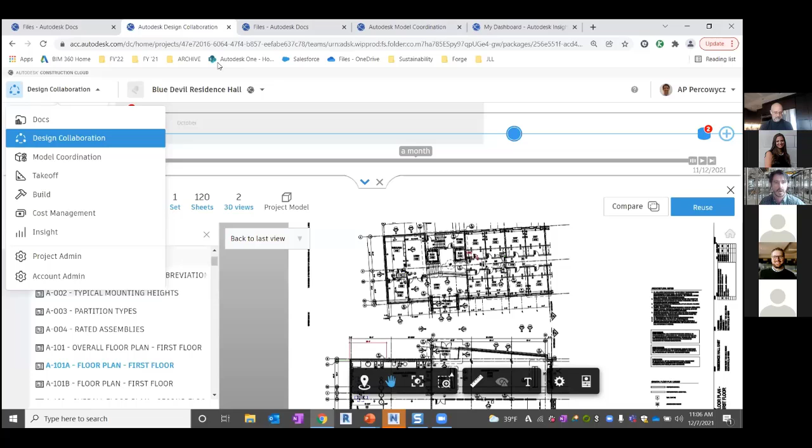So yeah, that was pretty much the scope of what I wanted to go through today. Apologies for some of the technical hangups in terms of the viewing, but hopefully you guys get the picture in terms of some of the 2D environment here. Let's see if the 3D might load from this environment as well. Yeah, that might be a good way of just demoing that quickly.

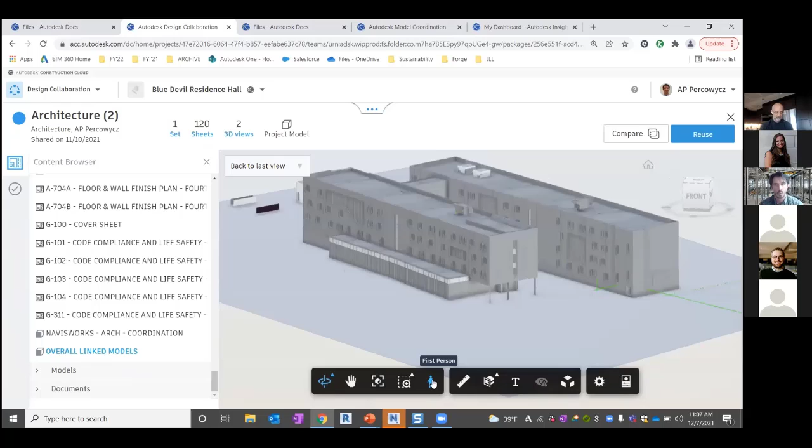Again, all web-based, no Revit installed. If I'm a project executive, if I'm a project manager, I don't want to be in Revit. Conversely, Revit designers don't want people that don't know what they're doing inside a Revit model either. This provides a very flexible environment for people to start looking through the space, walking the space, if you will.

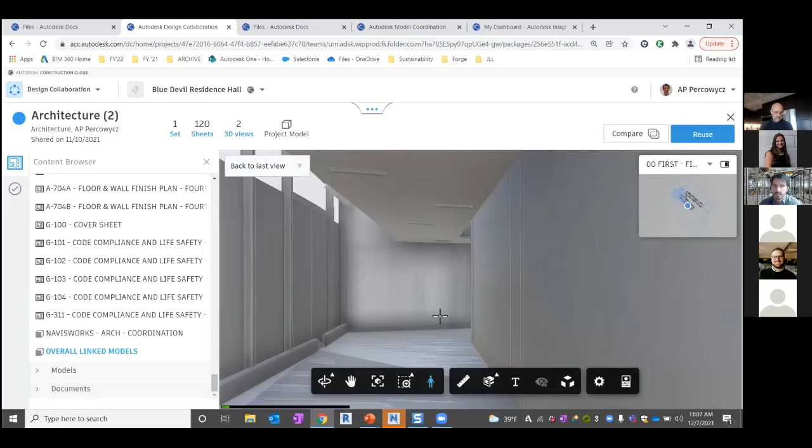It's not going to be the photorealistic view that Phil showed on the fly, but nonetheless, I think you can start understanding some of the spatial constraints of things that might not be adding up in terms of the design requirements or specific quality issues. And that's really where that ability to flag issues on the fly comes into play. You have the ability to actually go in and put a push pin on something that needs to change. So again, just geared around transparency and tracking of ongoings of a project.

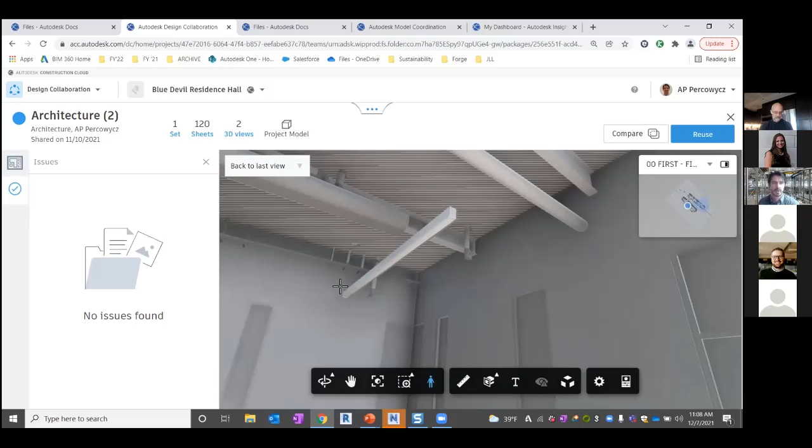With that, Josh, I think I'll give a pause here. I kind of moved through that fairly quickly, but just tried to give the audience a feel for the overall capability of the platform from a design only standpoint. There's plenty more on the CA and PM side of things. But thank you for that, AP.

We do have a couple questions. The first one is, how do you request updates from consultants, or is it only published models that are visible in Design Collaboration? Yeah, good question. So right now, the best way to request an update: if you're set up in this environment, you're seeing that someone hasn't updated their model for a while.

A couple ways to do that, right? You could just create an issue and assign it to that company saying, hey, provide us an update of your model.

I got to be honest with you, more commonly we see companies coming together, and this is part of my role, part of our customer success team's role. If there's a fit for a specific company where they think this will provide a lot of value to the way we approach a project, we'll typically try to do a demo session where we go through a lot of capability but also put in place some standard practices. One of those is exactly what the question's asking: what is the update cycle that's expected of the extended team, and how do we potentially automate that?

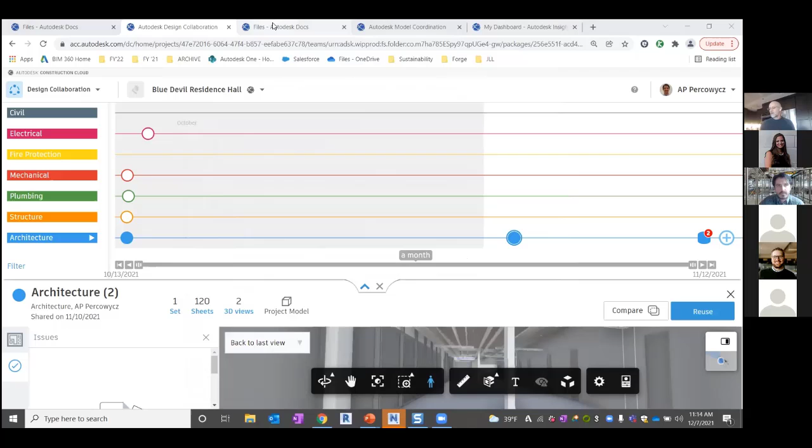Great question, that's actually an area I've given a lot of my own personal feedback on. If I go into an issue, just for everyone's context - and this wasn't launching earlier so I didn't demo this extremely well, good opportunity to do that - these issues are all customizable attributes. You can build this out as complex as you want, or keep it as simple as you want. So any of these fields are customizable.

To answer the question directly, the push pin does not tie to the object as a container yet - that's something they're working on. Right now it's just a push pin to an object, and there's not a lot of intelligence behind that yet. One component of the platform is to segment individualized objects as assets, so on a timeline you'll be able to click on the door and get the issue list tied to that asset as a container.

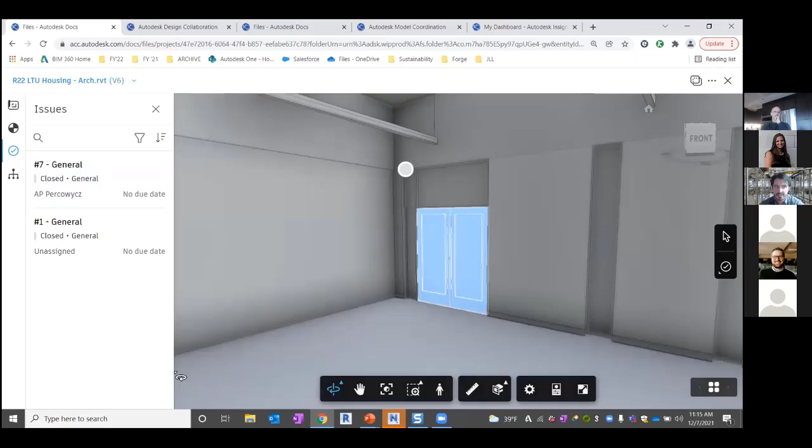But on that mindset of the question, in terms of running reports on specific locations or rooms - how many issues do I have affiliated with a specific space - that's where we can get into the location breakdown structure of the project, and that's customizable too. It's a very easy export: export the location breakdown structure out of Revit, upload into Autodesk Construction Cloud, and then you have your one-to-one matching in terms of room numbers, spaces, etc. That's one way to achieve the segmenting and reporting aspect today. Hope that answers it, thank you.

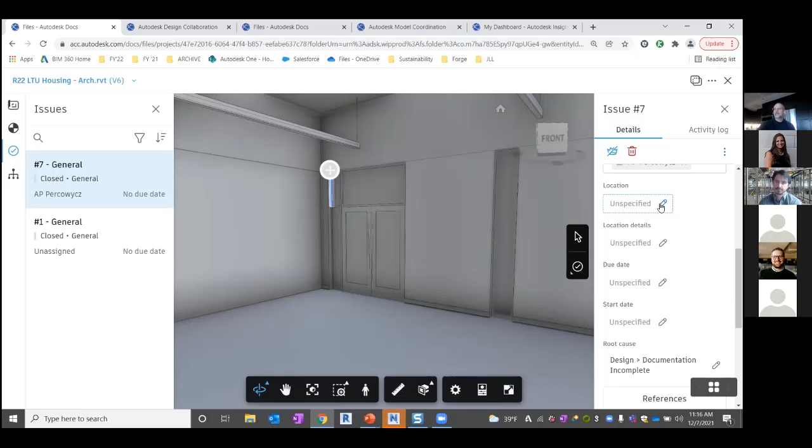And then the last question we have, unless more come in - feel free to type any other questions in the chat for any of the presentations here, now that we're coming up on the end time. The last question for you, AP, is, given Autodesk's push towards cloud services, do you see them adding any of this to the standard AEC subscription, or will it remain an extra licensing fee? Yeah, great clarifier there as well.

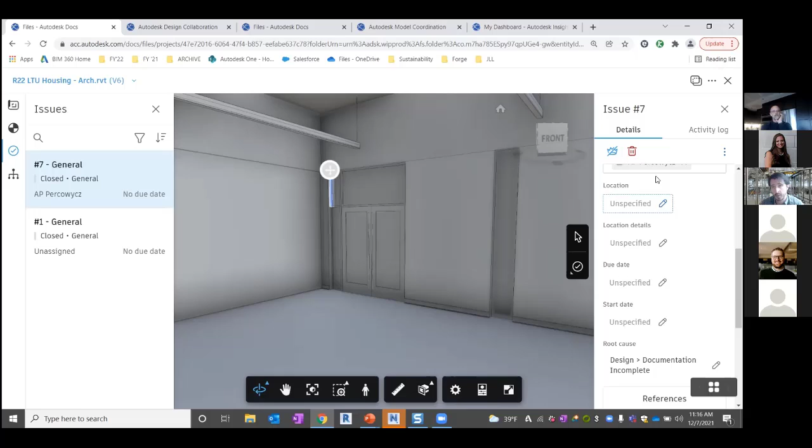Right now, in the current AEC collections offering that most customers fall into - if you're working in Revit, you probably have a collection - everyone with a collection assigned has access to essentially the docs component of Autodesk Construction Cloud. Now, the Revit cloud work sharing aspect, the work-in-progress live active Revit models component, does not fall under that service. But everything under this cloud-hosted project file type environment, you can statically upload Revit models if you want and just view them. Same with AutoCAD files - I think there's over 75 different file formats that Docs handles today. That level of project data management is included with your current AEC collection subscription.

So good clarifier - a good thing to understand is a lot of customers already have access to a certain level of this capability I went through today. A lot of times customers are just unaware or haven't tested enough to know what's what. And as an open offer, Josh, that is literally my role at Autodesk - I do a lot of project focus discussions, a lot of information scaling. So if anybody wants to look at the specific ins and outs of what they might already have access to, I'm happy to raise my hand for that. Sure, thank you for that - I know people here on my end are definitely interested. So thank you, yeah, definitely.

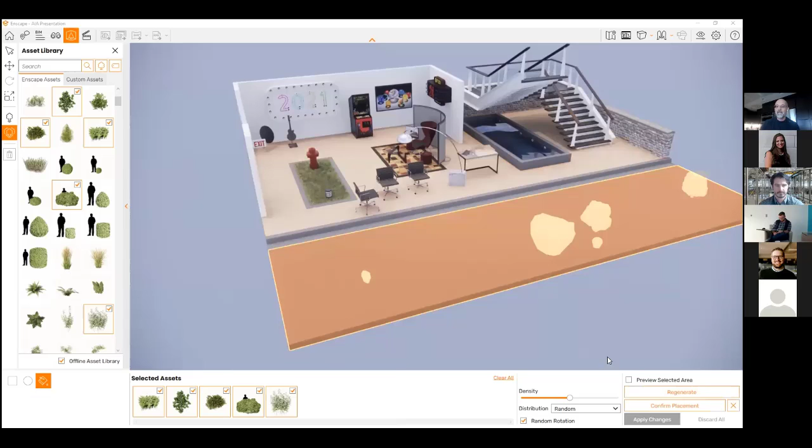The third option is your little paint bucket tool, so you can actually pick surfaces. You go, oh, I want to place them on this part of the site or that part, and click. What it's going to do is give you a density value, so we can decide how frequently we want them, less or more frequently. You can use a regeneration tool to decide how they're placed, and then you confirm the placement and apply.

And that's going to go back to Revit and place them. Then because they're in Revit, they're going to get visualized in Enscape - it's going to churn, download them, and place them. So there you go. Awesome. Thank you, Phil. You're very welcome.

Jared, I had a question for you. You mentioned automating the extraction of items out of the scan data. Just out of curiosity, what do you use to do that? I know there are some third-party tools out there - do you use specific third-party tools for that?

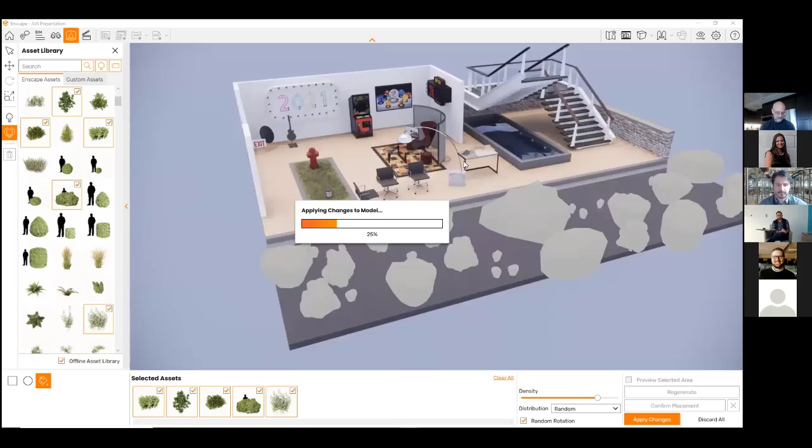I had experience with laser scanning five or six years ago and used some feature extraction tools, and they were kind of at the beginning stages. Could you speak a bit about how far that's come, or how accurate some of that stuff is at feature extracting, whether it's piping, duct, doors, walls, etc., from the scan data? Yeah, yeah, absolutely.

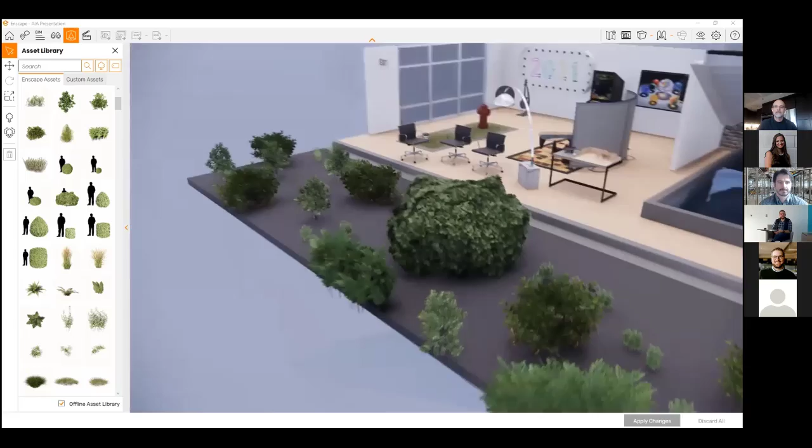Piping is primarily the thing that we use auto extraction tools for. We use a program called Edgewise, which you may have heard of, just because a cylinder is a primitive shape that's easily extracted. A rectangle or geometry such as a wide flange beam is much more complicated to extract. Edgewise can extract beams; however, you have to have really good data on all sides. It really depends on the data that you have.

A lot of times with duct, the scanner is placed below it, and you may have two sides of it and be missing the other side. So the auto extraction doesn't really work very well, so there's quite a bit of cleanup. It works really well for pipes. It works really well if you have great data for structure.

And then other than Edgewise, there's some other programs that we use. There's actually a freeware called CloudCompare that we use to help build topo. And if somebody needs a really accurate modeled mesh of a floor, we will use CloudCompare to create a mesh. So yeah, there's some stuff out there.

You just have to be aware of how the software is extracting it, and you can't be 100% confident in it. The auto extraction is going to make some mistakes. There's always going to be some cleanup that needs to be done.